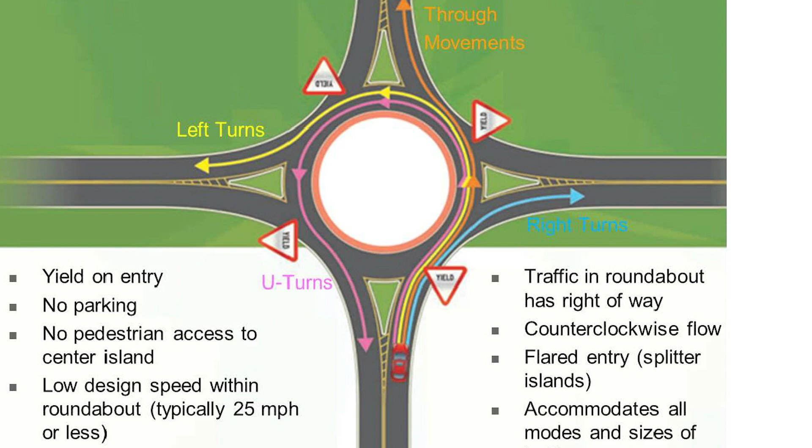The entry point into the roundabout is all yield controlled. There's no stop signs, typically no signals. Those in the roundabout receive the yielding from those trying to access it. It's low speed, typically 25 miles an hour or less, which helps with severity of crashes or crash type from a severity standpoint. It can also be used from a calming standpoint, like for gateway designs into various communities or residential areas.

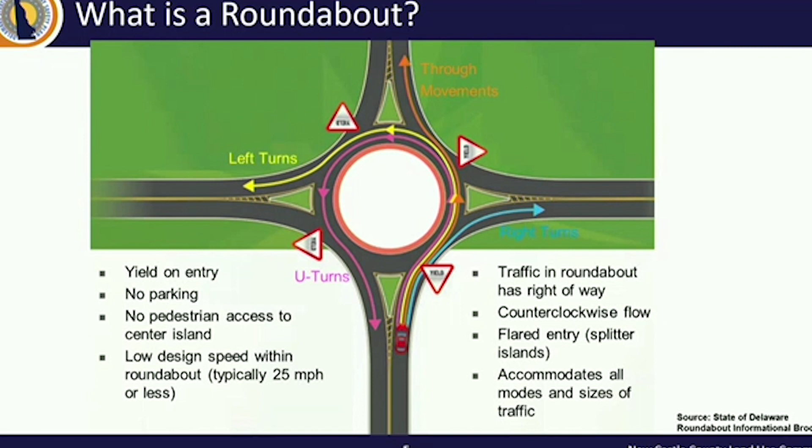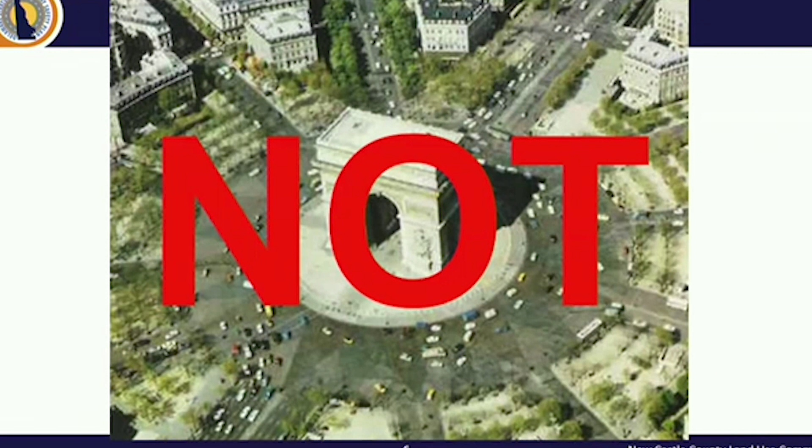So I mentioned about the no parking. This is not a roundabout. It just kind of shows there's a lot of things going on, even though there's multi-lane scenarios within the circular area.

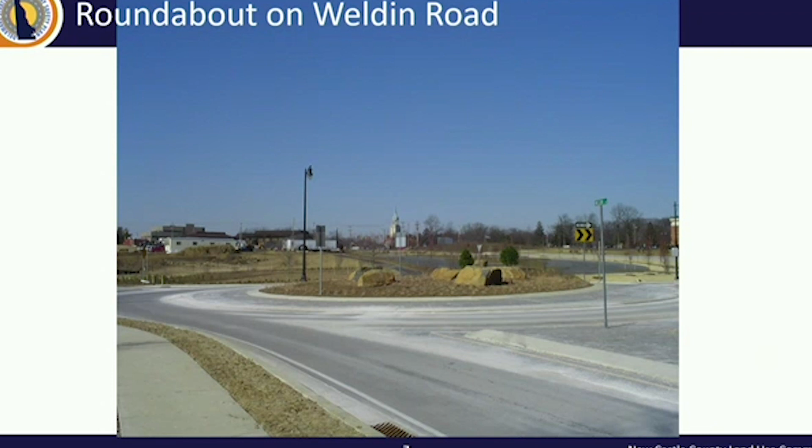Some of the ones locally that are considered a roundabout, this one is up on Weldin Road. It was part of the Blue Ball project, constructed several years ago. It's about 120-foot diameter and accommodates both the peds, the bikes, and the vehicles in the area.

Another one is right outside of Troop 2 in Bear, in the Glasgow area off of Route 40. Besides the state police facility, there's also the YMCA facility, so other users are traveling to and from the area. This one is about 130 foot in diameter.

Our multi-lane roundabout statewide is the one in Rehoboth, right as you're entering Rehoboth on Delaware Route 1A, or Rehoboth Avenue. The diameter is about 170 foot, but again you could see the various usage with the peds in the area. There were also bike connections provided recently to the south or western part of the roundabout.

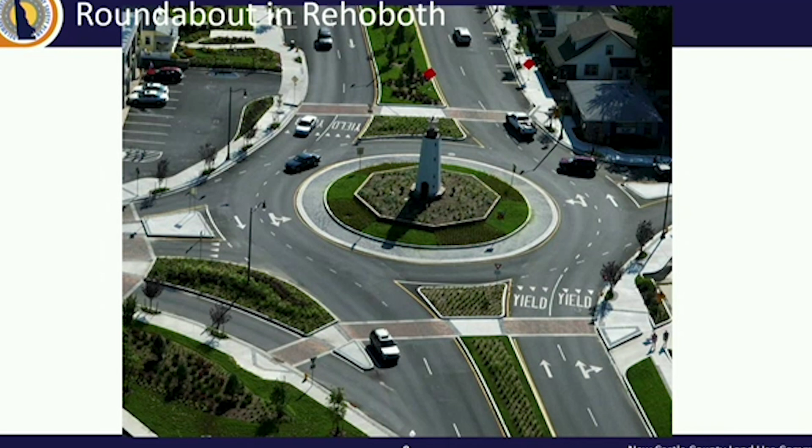The intersection control in Georgetown, right there in the center of Georgetown, is not considered a roundabout because of the parking aspects and the conflict points that exist at the circle, or circular intersection. Even though it has similar characteristics with the various usage, the counterclockwise flow, the yielding condition, the conflict points within the area deem it not to be a roundabout.

One of our smaller roundabouts, it's actually considered a mini, and it's on Mifflin Road in Dover. The diameter is about 45 foot.

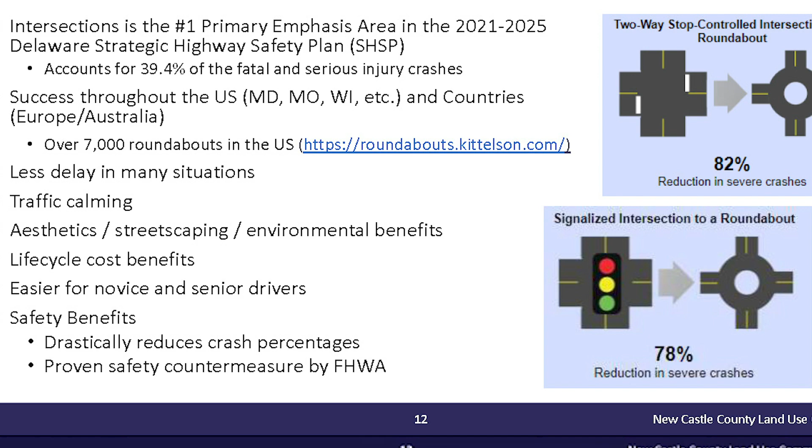We also know that from a vehicular delay standpoint, because there's no stops, no traffic signals, no red, yellow, and green indication, it's a free-flowing movement through a roundabout. Vehicle delay and even driver frustration may be reduced because there's less stoppage or wait time, which can have environmental benefits in the long run.

Continuing on the safety benefit standpoint, the biggest thing is when you look at the two images on screen from a conflict point reduction standpoint: a traditional four-legged intersection has 32 conflict points, where a roundabout is reduced down to 8. When you start reducing those conflict points, you start eliminating a lot of the angle crashes or left-turning crashes seen at traditional intersections, which have a higher severity of crash type.

So your fatals or serious injuries. When you look harder into just the fatal and injury crashes, you start seeing percent reductions in those categories when a roundabout is considered: a 90% reduction in fatal crashes, 75% in injury crashes, about 30 to 40% reduction in pedestrian crashes, and 10% in bicycle crashes.

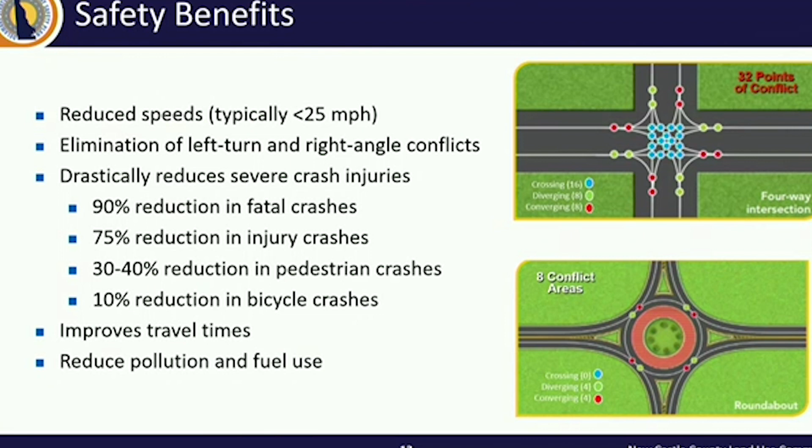So when do you consider a roundabout? In theory, as part of any traffic study request or evaluation standpoint, or what's sometimes considered an alternative intersection analysis, you look at what we term the various categories of intersection control.

The existing condition is typically some form of control, sometimes a two-way stop, it can be an all-way stop, or a signal, and you try to look at various alternatives based on the existing condition. From a stepwise standpoint, thinking like a two-way stop, our typical progression is looking at all-way stop, signal, and then a roundabout. A lot of those intersection controls have similar analysis tools that are utilized.

and can accommodate various volumes. They have different benefits from a calming standpoint or a crash severity standpoint. Just comparing to an all-way stop, we are seeing statistically, from a research standpoint, that several crash-related categories—angles, rear ends, serious injuries, fatals—when a two-way stop is converted to an all-way stop, those trends get reduced.

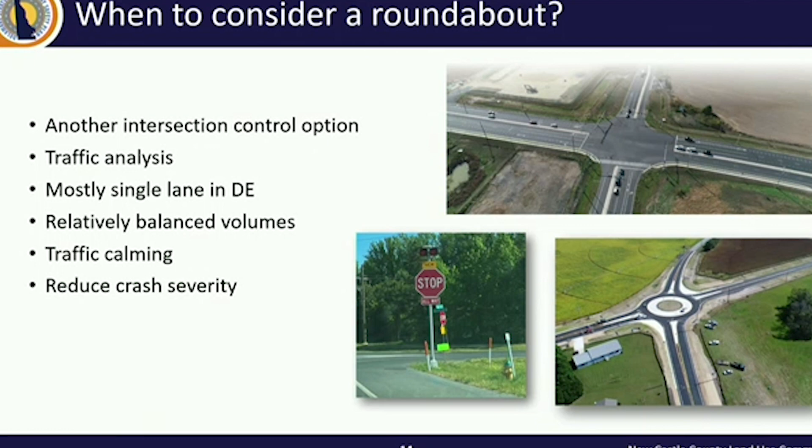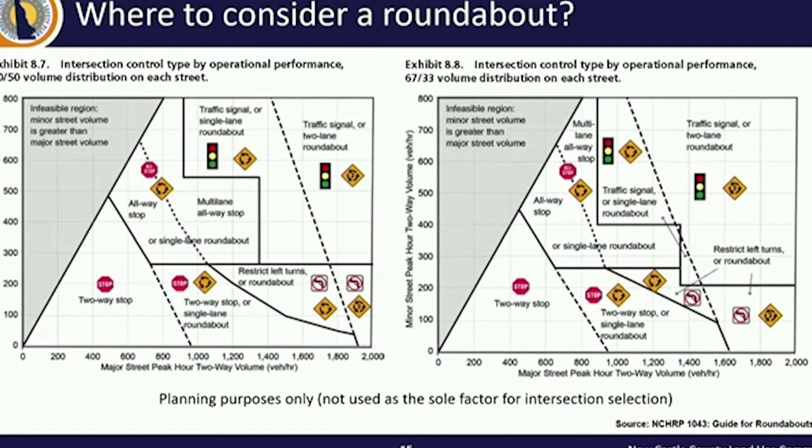From a recent publication, NCHRP 1043, just published this month—from a high-level planning standpoint, when looking at different intersection controls, they were able to produce these charts to help with the decision-making process at, I'll say, a macro level viewpoint.

We're able to look purely at the volume of the roadway during the peak hours or any real hour and see what type of intersection control treatment could be viable.

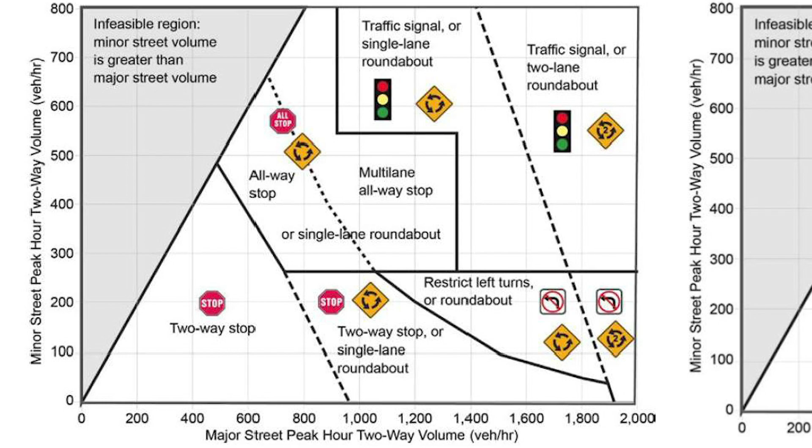Probably the biggest takeaway from these charts is when you look at the symbols of the different intersection controls—all-way stop, traffic signal, the circular roundabout indication symbol, and even the turn restriction symbols—the majority of the symbols that overtake these charts is the roundabout. That's where you can see, from an applicability standpoint at a high level, just based on the major and minor street volumes, a roundabout is likely going to be feasible in various situations.

It still needs, I caveat that with, there still needs to be a traffic analysis and evaluation process to dive deeper into the intersection as a whole, to understand the delays, the measurable level of service, and whether other features are needed besides a traditional roundabout, like a bypass lane condition. Those are things that get you to dive deeper into the traffic analysis. But from a planning purpose, the roundabout, for the most part, outweighs several of those other intersection control treatments being shown on the screen.

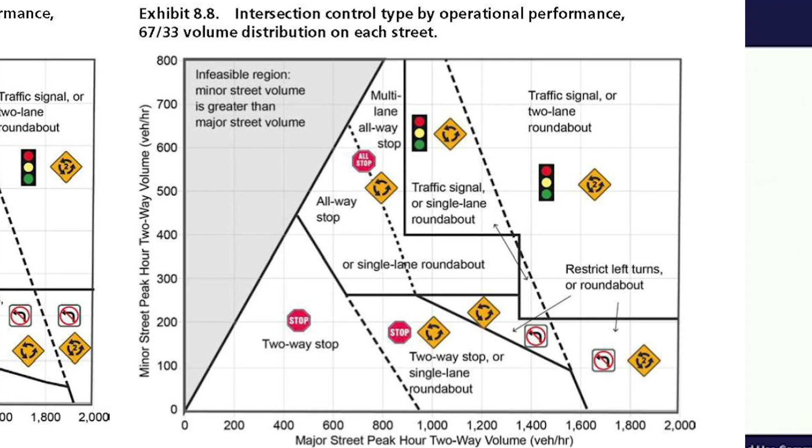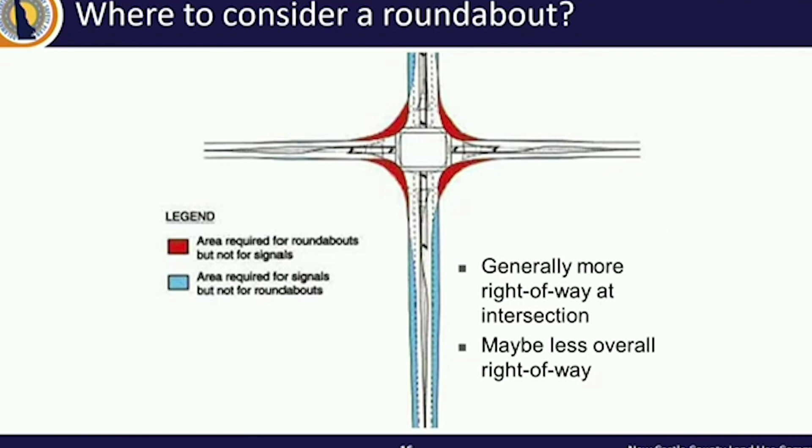So where and how many do we have statewide? Presently we have 30 roundabouts. The last one opened and operational was in Delaware City, outside of Fort DuPont. But we have them scattered throughout the state.

Most of the ones we keep track of are also available on our roundabout website, which I have a link to at the end of the presentation. There's links, there's information associated with them, and a lot of other educational material on roundabouts on our website.

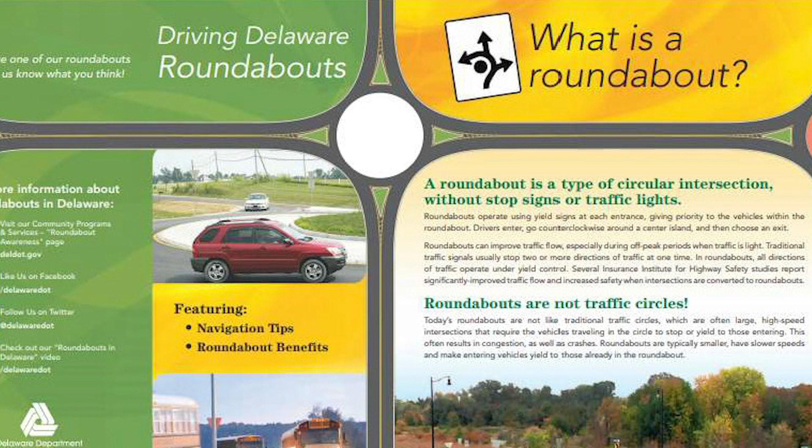So how do we help promote or educate on roundabouts? It's still considered new. Even though the idea of a roundabout has been out there for decades, it's still a new concept in Delaware. Only having 30, compared to other states that have hundreds, means it's still something we need to do our due diligence in educating through various opportunities like this one given tonight.

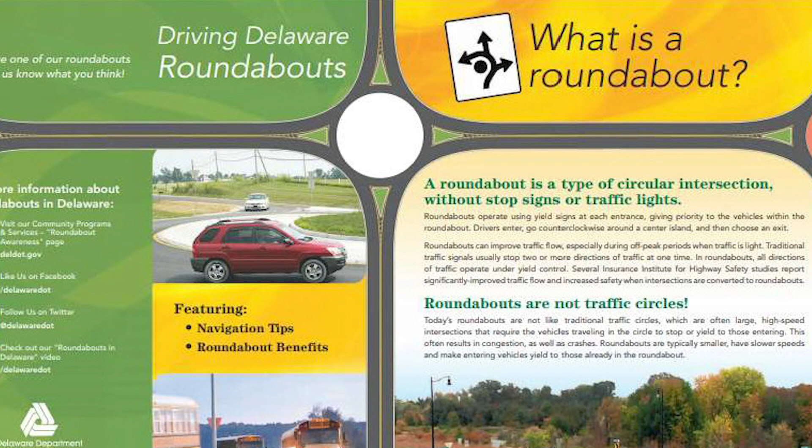During the planning and design phase, we try to do as much outreach and answer questions associated with the intersection control treatment. We do often receive positive feedback after it's constructed, which is a good thing.

But in order to help educate, we have brochures, we do workshops and presentations like the one tonight. We have a ton of information, whether it's on our Strategic Highway Safety Plan website or our individual roundabout website. We have YouTube videos on the usage and how-to for roundabouts, whether it's biking and pedestrian usage.

We work hand in hand with our Motor Vehicle division and our Department of Education on education courses with the driver's manual. And individual projects will have their own public meetings, which I have a few examples of within the remaining presentation to show how that helps educate individuals and residents on what is being proposed at a location.

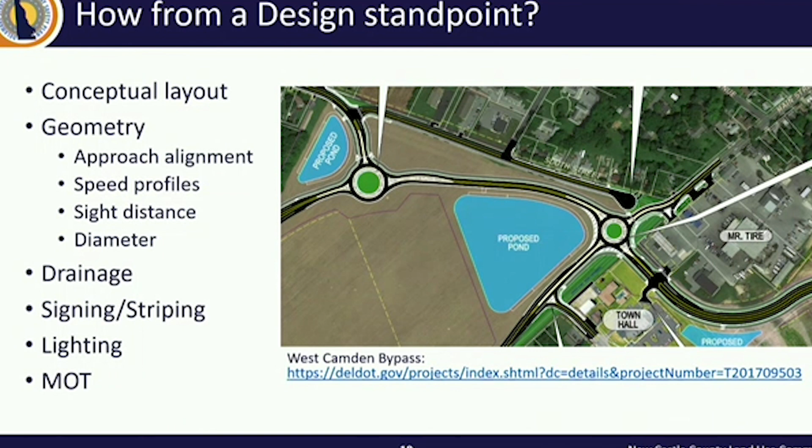So there's things that have to go into the sequence of construction with roundabouts. I mentioned the speed and traffic calming standpoint—one of those things is the speed profile, knowing that driving through a roundabout is at a reduced speed of 25 miles per hour or less.

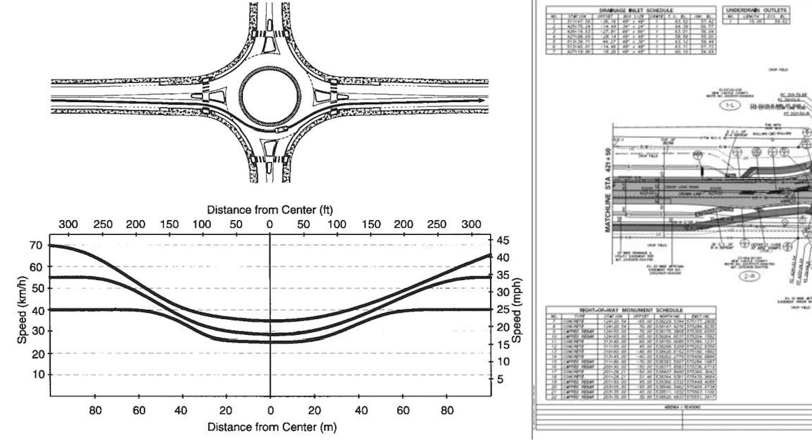The image and chart on the left help identify how, if you were approaching a roundabout at a higher speed, the speed profile changes as you approach the center point, which is the 0 point of the chart. As a vehicle closes the distance to that center point, it decreases speed to typically 25 miles per hour or less. This can vary based on design.

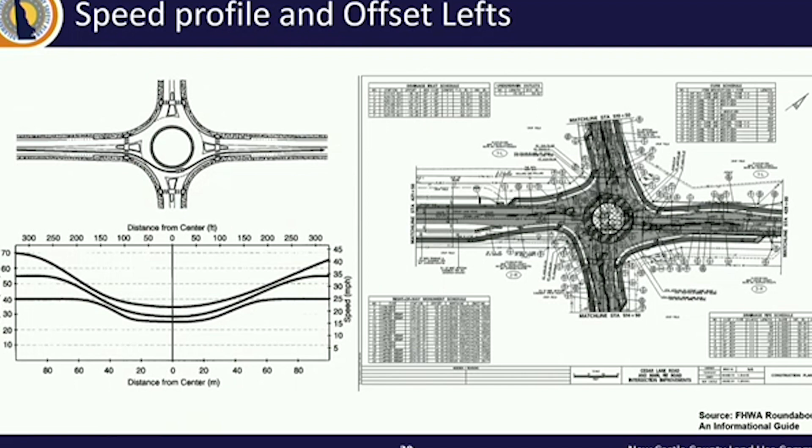The image on the right, for the Cedar Lane and Marl Pit Road design plans, shows the offset left—essentially the left turn condition is offset from the typical path as you travel through the intersection, so it avoids a higher rate of speed through the roundabout. That's another geometric feature that can be applied during the design process for intersection control.

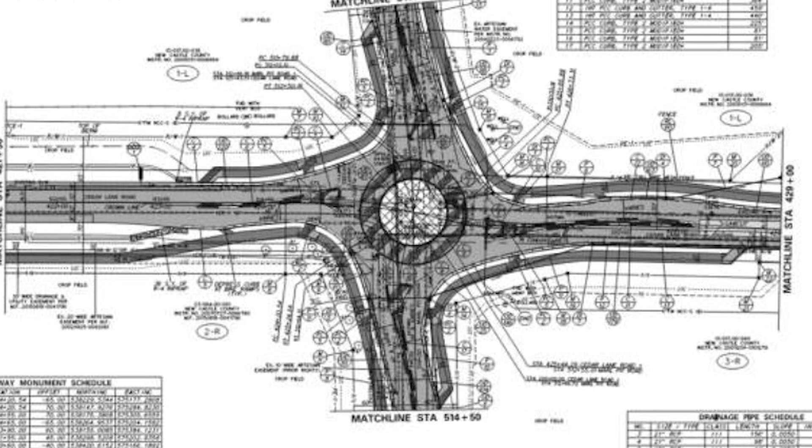From a signage and striping standpoint, the Delaware Manual on Uniform Traffic Control Devices includes information about how, whether it's a single lane or multi-lane approach, the signage and striping—the traffic control devices out there—should be looked at or pursued. It takes into account the various road users. There are other details for accommodating bikes, but traditionally these are what you'd typically see or start with for a roundabout.

In some cases, other devices can be accounted for and deployed on the approaches, like a radar speed sign if needed. That's where we adjust the various spacing or signage placement for those specific requests and situations.

I'll say our partners at Federal Highway Administration are currently updating the Manual on Uniform Traffic Control Devices. Once those updates are provided, the department will go through a review process, so these images I'm showing today could have some minor changes in the future. Just want you to be aware of that.

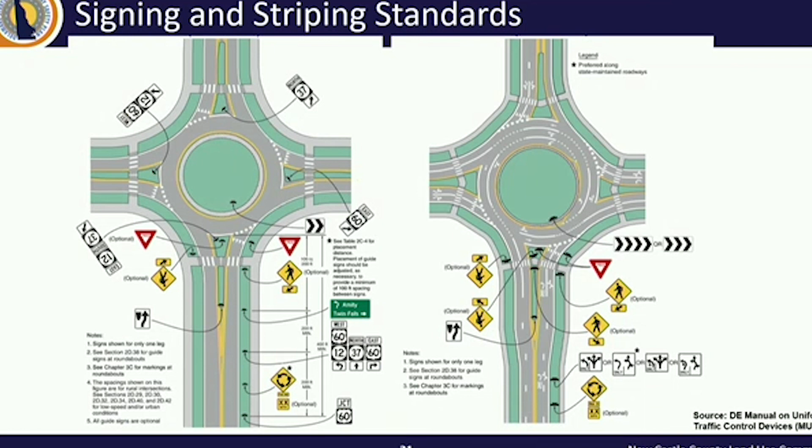Trying to accommodate drainage, because weather is going to impact the construction season and activity. So how existing drainage as well as final drainage is going to be accommodated at a specific location needs to be addressed through the sequence of construction process.

How the paving is going to operate, whether it's temporary pavement conditions at various times of the day or during construction, and grading—we don't want to foresee drop-offs or create an unfavorable situation for a vehicle or other user.

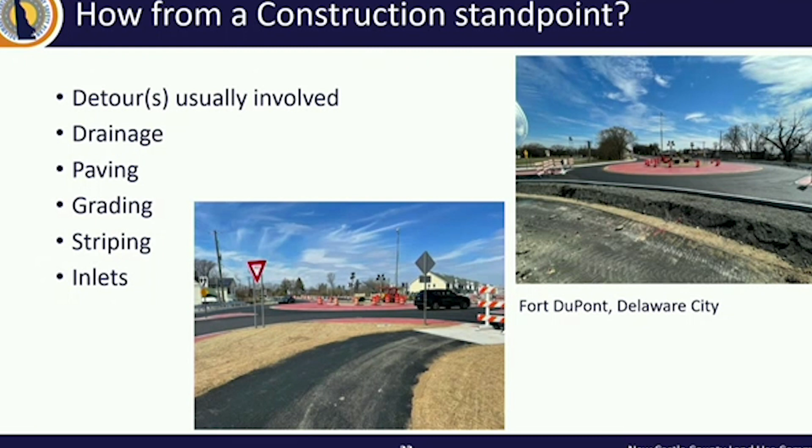Hence why in some of the pictures you see barricades, whether it's closing the shared use path, for detoured traffic because it may not be at the final or acceptable condition. Temporary striping may need to be applied. Lighting—in the images you can see light plants that are deployed while permanent lighting is still being constructed for the project.

So Cedar Lane and Marl Pit, which was constructed a few years ago, you'd see the construction activity usually working offline or off alignment as you're approaching, with the contractor trying to get that infrastructure in. There's still some infrastructure at the intersection that would be done, but the all-way stop remained while it was being constructed, and during various tie-ins, that's when you might see a detour or something along those lines.

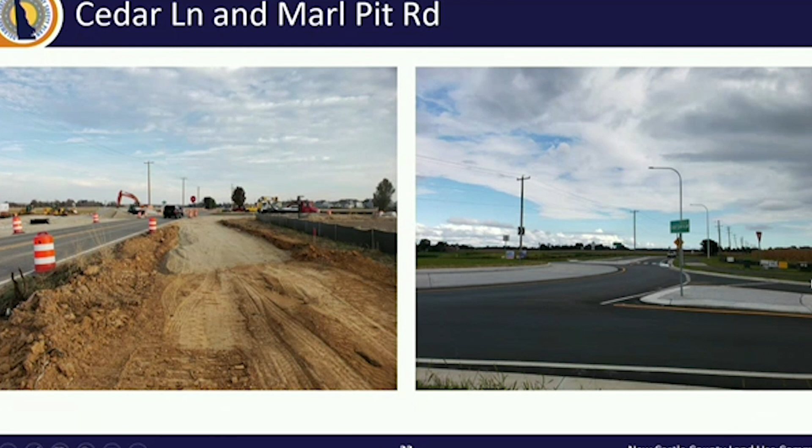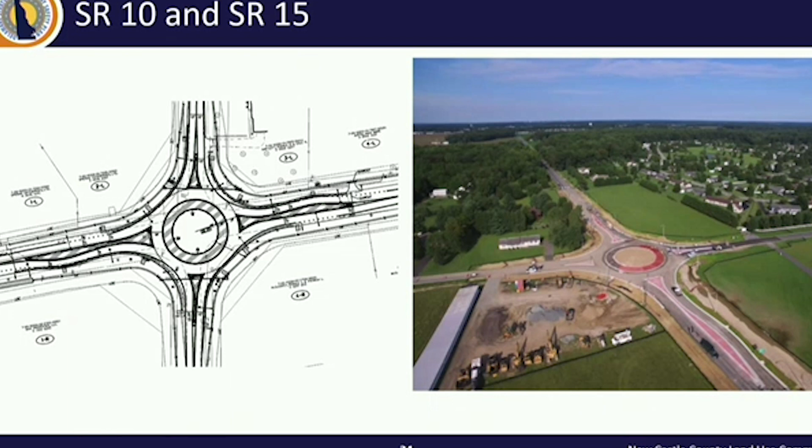There are other benefits from a cleaner construction component with regards to joints and aspects associated with it. This roundabout is about 150 feet in diameter, so it's a wider, larger roundabout than some of the ones I've previously shown.

Zoar Road, Speedway, and Bethesda outside of Georgia, south of Georgetown. Again, similar from a construction standpoint, but even from a concept standpoint you could see where original ideas were laid out regarding connections, and how primarily the Zoar Road approach would come in with the intersection. As the design is being fine-tuned and pencils are being sharpened, that's where you start getting into where those impacts are really showing, which is more confined at the overall intersection at the roundabout.

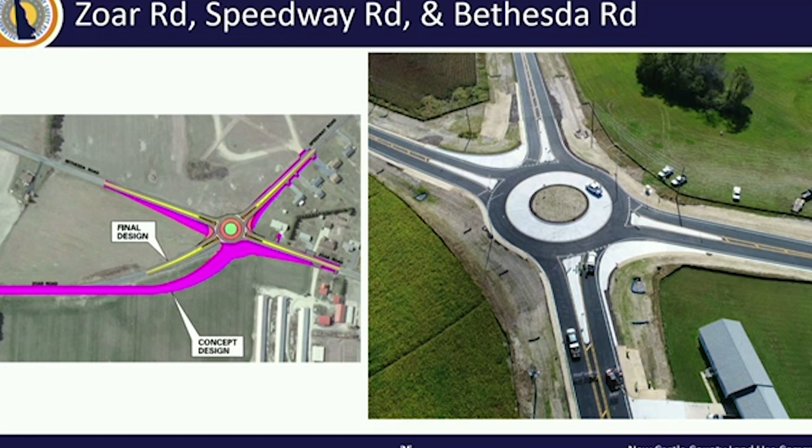So another new one: Brick Mill at the emergency hospital in Middletown. This is what we call a compact roundabout. At Mifflin Road, the mini, I mentioned there's a concept out there on operation of a roundabout where there's no signage in the center median. This is that location. You can see there are no signs in that gray circular center island. It's a 90-foot diameter, so it's smaller than the 150, 130s I mentioned previously. It's double the size of Mifflin Road, but from an accommodation standpoint, larger vehicles can still make the maneuver to access any of the points of interest at the intersection.

It's mainly where they would utilize that center island to access that approach. So if they needed to make a left turn and needed to make the accommodation, they would be able to drive over that center island, which is built structurally to accommodate those larger vehicles. The approach or center island is mountable, but it still has a raised condition, usually about 1 to 2 inches higher than the pavement surface. So there's still that in-roadway feel, the driver feel of going over a bump in the roadway versus it all being flush.

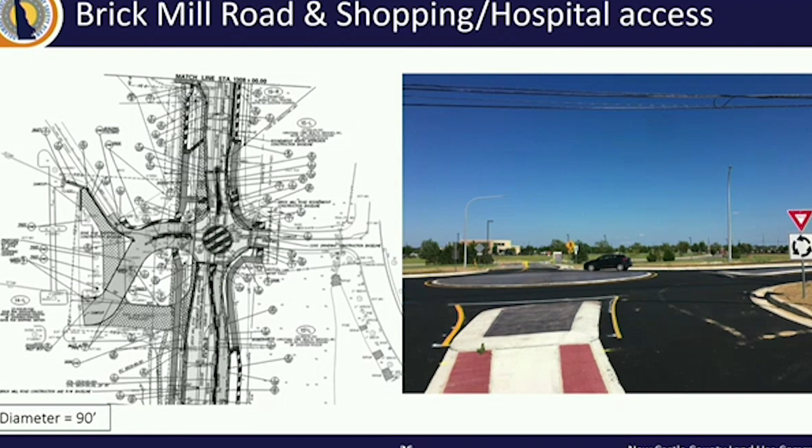From a summary standpoint, there's a lot of research out there. One of the most recent documents is the NCHRP 1043 guide for roundabouts, but there are several publications from the national panels and reports, our partners at Federal Highway, as well as our own DelDOT publications, including our traffic calming manual.

It's mainly built around subdivision roadways, but still provides information on some smaller roundabout features, as well as our design guidance memorandum, which is currently under review. Our primary focus is how national research has provided information on geometrics, as well as getting alternative intersection operation into the forefront of the analysis or guidance, so certain elements can be captured to understand the percentage of trucks on a roadway, both now and potentially in the future, and how that data can help assess the size or impacts of a roundabout treatment.